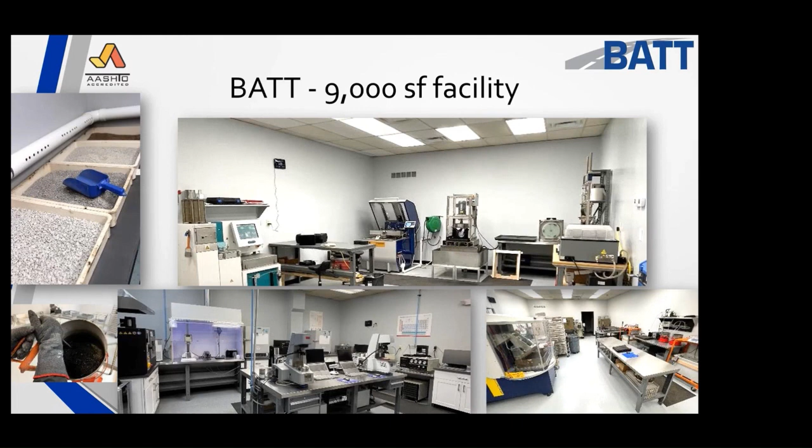Other things that I offer, as you know, I get into everything from consulting services, product development, and training, and so on.

The product development side, where I've really worked closely with Surface Tech, where they've allowed me to say, what else can the fiber do? Well, Phil, do you think it could do this? What test could help us understand this? And on a commercialization piece, which direction do we need to look at going?

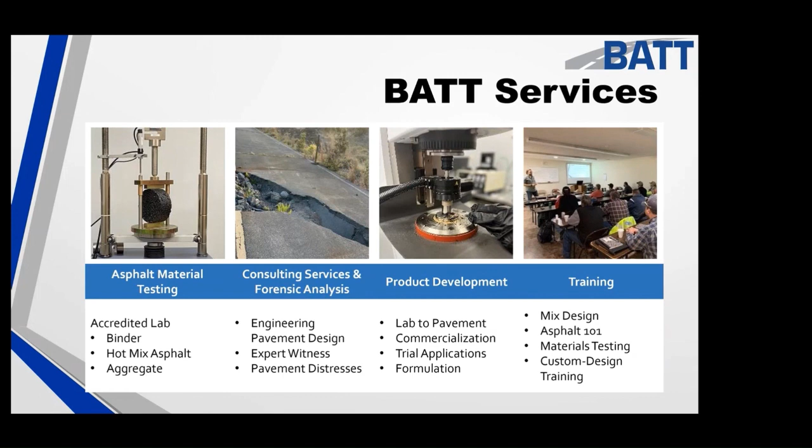And Surface Tech has been one of my number one clients since 2017 when I jumped down this road.

Something new that we've added is pavement condition index monitoring, and PCI, as we call it, video monitoring, where it gives an interactive map where you can go and begin to look at it. Surface Tech recently did this, and it's something we add on to it, where I have values of their pavements.

George, you saw that in the previous presentation, where we went through and we looked at different pavements and what their life looks like after 5 and 6 years.

Now, I'll throw this in there. If I were to look at aramid fiber over concrete after 7, 8 years, it's probably going to look about the same as regular mix. It's going to show a big delay up front, but eventually it's going to crack because you've got a mismatch of materials. By using the interlayer and the fiber, you can begin to remove cracking altogether.

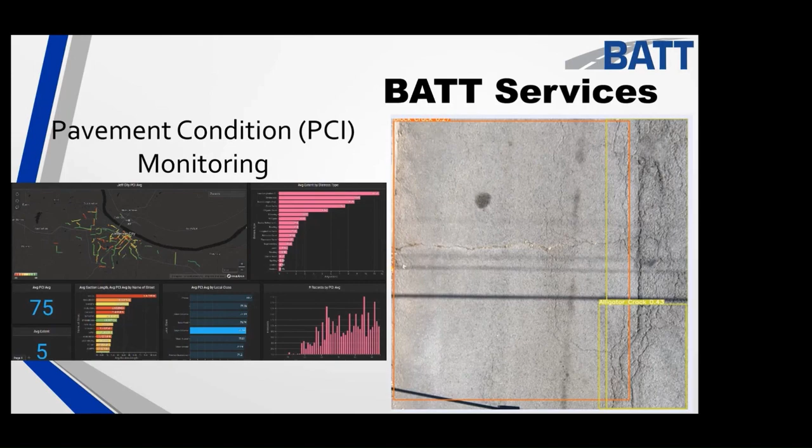I'm not going to say we can remove reflective cracking and stop it, okay, because it's going to come through at some point. But I'm going to show you data that I think you'll be pretty impressed with over what we can do.

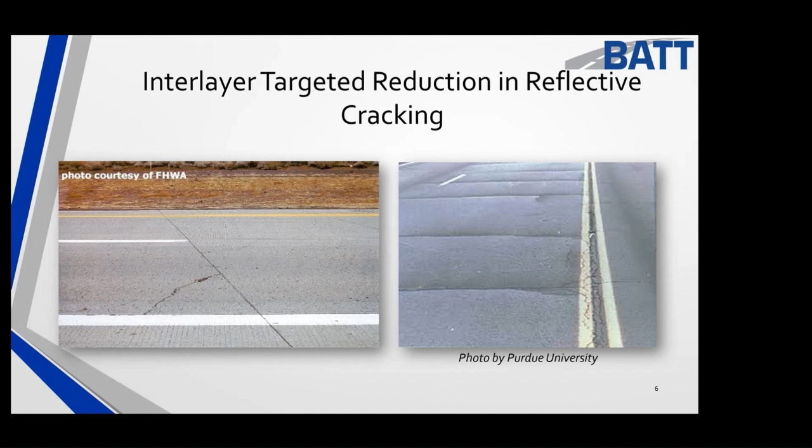So the background, as I mentioned, reflective cracking happens anytime we have a mismatch of materials, asphalt over rigid. When you put anything over this picture on the left, the crack will show through, especially the transverse crack. Longitudinal cracks, not as much. Corner breaks, not as much. Mid-slab cracks, not as much. But where we've done a saw cut and have a defined joint that wants to move up and down, the load transfer from one slab to another typically starts to drop below 90, and now you've got movement that can be pretty significant.

In the early 90s, these were being used with various levels of success. The French called it 'sand anti-fissure,' but they never really could get it to take off because they never addressed the different climates that we may see.

1998 is when I jumped onto it. Koch is a very large polymer supplier, and they saw this as a really good play for us, a good way to develop high strain polymers. Not any polymer would work. A lot of people tried it, but to get something that would go, for instance, in a fatigue device—George, you just saw people run tests in a fatigue device at 2 and 300 microstrain. I was running tests at 2,000 to 3,000 microstrain. Not 200, not two. I'm operating at 2,000 microstrain, which is unbelievable. The machine itself begins to want to jump off the table, and you have to have it in the chamber. It goes into resonance if you don't adjust it right.

I like to think of this material like a VP told me one time: I broke a machine. It cost $20,000 to repair, and he said, 'Phil, you seriously broke a machine with this'—it was Brian Majeska, Steve. He said, 'you broke it,' and I'm putting my head down, feeling bad. And he said, 'no, Phil, this is absolutely awesome, incredible that our new material broke a machine.' So a neat way to think about it.

Now, what looks really simple, guys, is a razor edge design. It's a 4.75 millimeter mix, usually placed about 25 millimeters thick. Asphalt content, I'll tell you, even goes 8.5 to 9 to 10% asphalt—impermeable. You look at this and say, there's no way it's going to work. Just wait, and I'll show you, because this is an area where I like to do the things that people normally don't do.

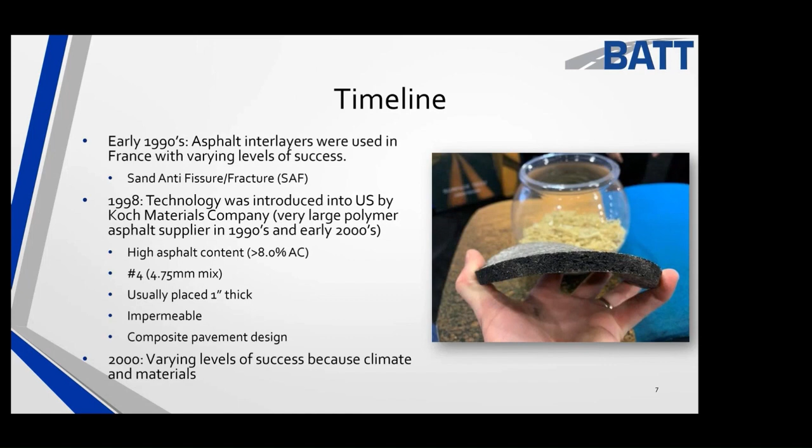In 2000, we saw varying levels of success because we were trying to do the same thing the French did—we had one product and were putting it down everywhere. So what we did was begin product development, and I pretty much didn't travel for two years, putting down products in the northern U.S. to the mid to the southern, from near Minnesota all the way down into Texas and across the U.S. At the same time, I was putting them down in China. China took off with this, and they probably today put down more than anyone. They took the technology, pretty much kept the technology—won't go into that one—and kicked us out. But they absolutely loved it.

One thing we found out was that we were looking at 4-point flexural fatigue, but not just doing it at 20C—we're doing it at 15 and 10C. So we began to base this system on climate, and we're looking at in-place air voids of 2 to 3%, not your typical 7 to 8%. Makes a lot of people really nervous. We used a Hveem stabilometer back then for rutting.

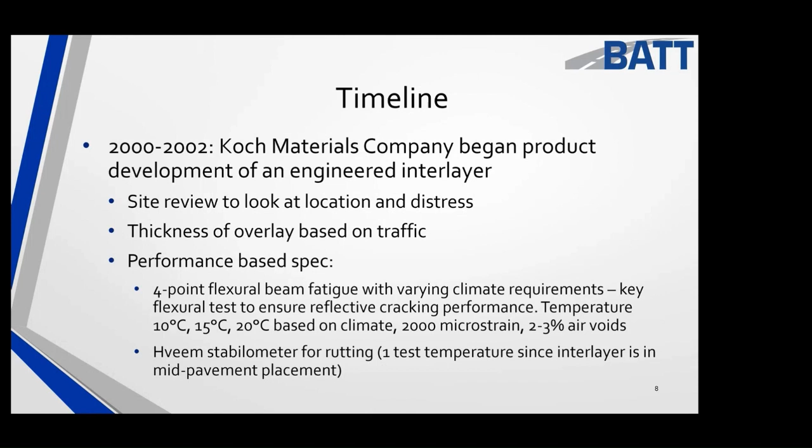Now, one thing I want to add, and I know somebody wants to ask the question—did we ever have a pavement fail and rut? Not one. Not one to date. I've done probably 27, 28 installations in the U.S. Not one ever rutted, going back to 1998, and a lot of these are on high traffic routes.

Can it be used over asphalt pavements? Absolutely. Could you use them in parking lots? Yes. The only pushback is that you've got to have a decent overlay thickness to protect the interlayer—we'll talk about what that looks like. You cannot leave the interlayer exposed to high traffic. We could design it so you could, but the problem is, since it's impermeable, it becomes slick. That's why you really need to be able to cover it up.

So in 2002, 2006, we continued on with our development, but we also worked with University of Illinois. We worked with Bill Buttlar, Eshan Dave, while he was still there, a young man named Song who's now with Caltrans, and a guy named Wagoner who worked over in Pennsylvania.

So we had a goal. This was called the National Science Foundation Grant Opportunities for Academic Liaison with Industry, meaning we worked together with the university on a $250,000 project to begin to take the $1 million we'd already put into it and add more to it with modeling.

I don't know if any of you have heard of the DCT test. The DCT was developed out of this project. Steve, I know you've heard about it. This is where Phil Blankenship first met Eshan Dave, who is now considered somewhat the father of the DCT, along with Bill Buttlar. So this is why I've got a gray beard. It's a long time ago.

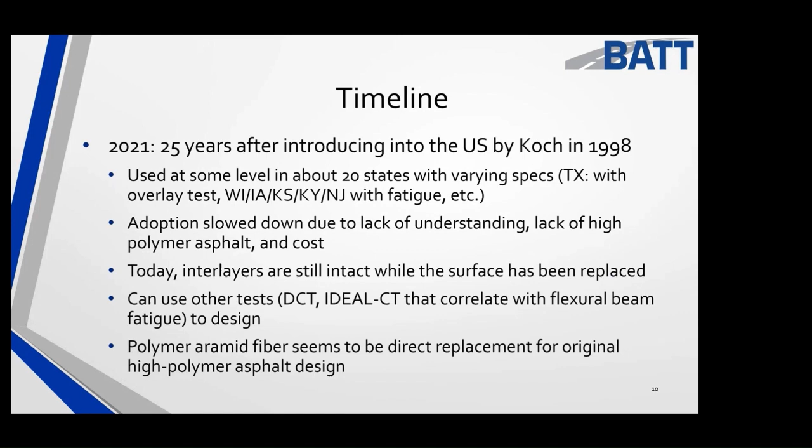You can use other tests, DCT, IDEAL-CT, that correlate with flexural fatigue, and I'll show you how that works. And then what we found out is that aramid fiber is a direct replacement for original high polymer asphalt design, and even gives this another kick that we weren't able to do before. I think it's made it a lot better product.

Some examples — one we started, and the reason I mention this one is there's a TRR, Transportation Research Record, paper on it. And by the way George, I was talking with a friend of mine, and there are several places where I wanted to publish some stuff, and I've decided instead of keep kicking it to the U.S., I may just start putting some stuff your way and over in Australia, and that'll give me a reason to come your way, right?

The Australian Road Research Board and so on are a highly respected consortium over there, just like TRR, Transportation Research Records, are here. So this made it into the Transportation Research Records.

We tried to overlap the joint so that you did not have a joint on top of another joint. That technique has taken off in the U.S. today, where they do a lot of that overlapping, not just with the interlayer. They've done that now with others, whereas we used to build joints on top of joints, which was not right.

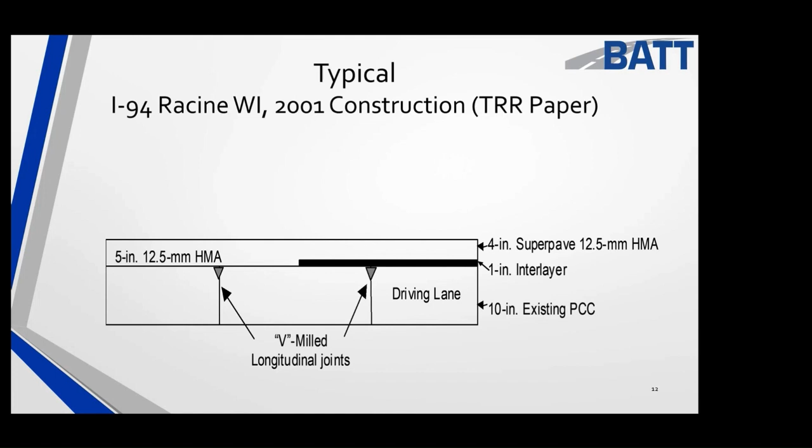I love rubbleizing, but the moment that you rubbleize, you just devalued your whole concrete pavement. So this is a way that we can leave the concrete in place without having to shut down these pavements for a long, long time.

This was the project in 2001. Studies began to look at it, and after 2.5 years they began to see results. In the early years there wasn't a lot of difference, but then the interlayer began to outperform early on.

Now, this was just one time, from the paper that was done in 2004. After I left Koch in 2006, I didn't follow it up anymore.

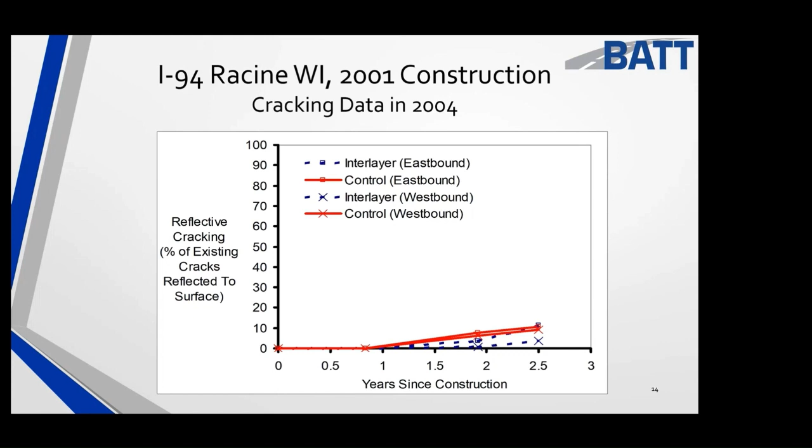But some pictures were interesting. The control had very defined cracks compared to the interlayer. This was a bad pavement, folks. The interlayer had a hairline crack versus this massive crack, which went all the way down, allowing a place for water intrusion.

This one was actually offset so the original joint would have been about 3 feet over here. We tried to understand pavements like this, chasing these cracks right down to the joint. The joints were up to 3 feet apart - about a meter offset - and the cracks were offset at 45-degree angles over this pavement.

This again is a 25 millimeter layer. I want you to look at this and what it's doing. This part here was completely intact, so the water path was cut off. That is when we knew this interlayer was much more than a crack delay - it improved rideability and long-term life because it removed water from the base and so on.

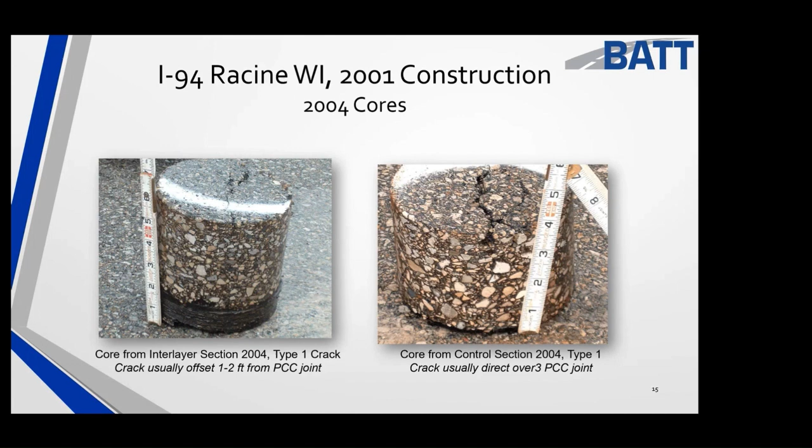We then went to a very cold region in Decorah, Iowa. This is one where we believed we had nailed it. What I did was take the picture on the right after about 4 years - let's see, 3 winters over 4 summers, so 3 winters.

I took a picture on the right. I'm in the middle of a roadway, people watching, but it's Iowa, so there's not a lot of people out - you just have to be there to understand it. So I'm in the middle of a roadway with people watching my back, and I take a picture of how they've already treated it. Look at the reflective cracks. Look familiar?

The interlayer section was behind me, so I did a 180, turned around and took the picture on the left. Can you see a difference? What's amazing is this roadway already had maintenance, so they've already spent thousands on it. This one, they didn't spend anything on. And that's in a cold area - that was just remarkable.

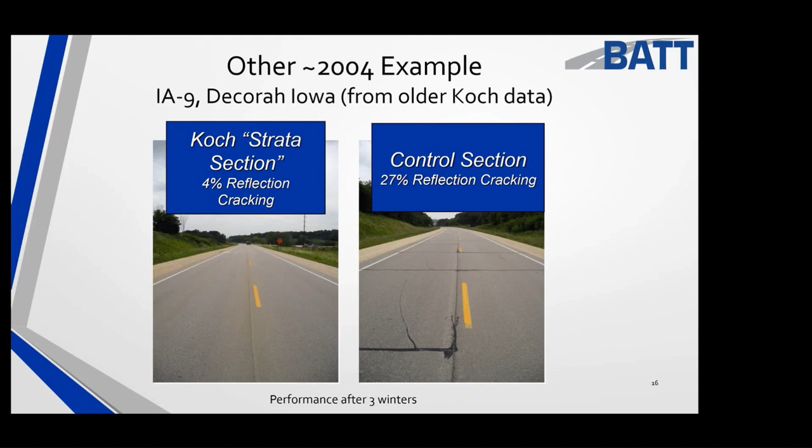So we move forward, and I'm working on a project with an engineer friend of mine. I'm on a consortium in Kentucky for general aviation airports, where we're writing specifications - I do a lot of work on that. One of the things that came up was this early micro cracking, and they said they wanted to build up this pavement surface, but when you deal with airports, you really don't want to mill anything off. You always want to leave the structure intact.

That way you can have heavier loads, and your airport gets upgraded. So they wanted to put down an interlayer, and Gary said, Phil, can we do it? I said the problem is I can't get the asphalt product anymore. I started scratching my head, called Steve, and asked if in 2 weeks he could help supply something, because I wanted to try this. Sure enough, Surface Tech got in place and was able to put fiber on this job. It actually ended up being less expensive than the interlayer of old, because now we're using fiber, not specialty asphalt. Turned out it was a direct replacement, if not even better.

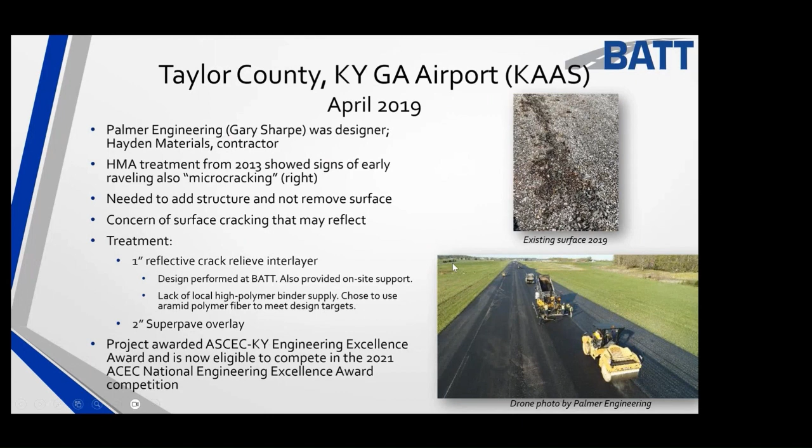This is not for the average person to do. This is 8.5% asphalt, it has aramid fiber in it, and you're looking at about 8% dust. It's a fine graded mixture, and it's 25 millimeters thick.

Watch what happens when you put a roller on top of it. By the way, everybody gets nervous, even the roller guys tend to not want to roll it, and I have to sit there and look at them and say, guys, put the roller on this.

You'd never know it's an interlayer, would you? Pretty incredible. It's not pushing laterally. And that just goes to show you, we've got to really get out of the box of where we'd normally be.

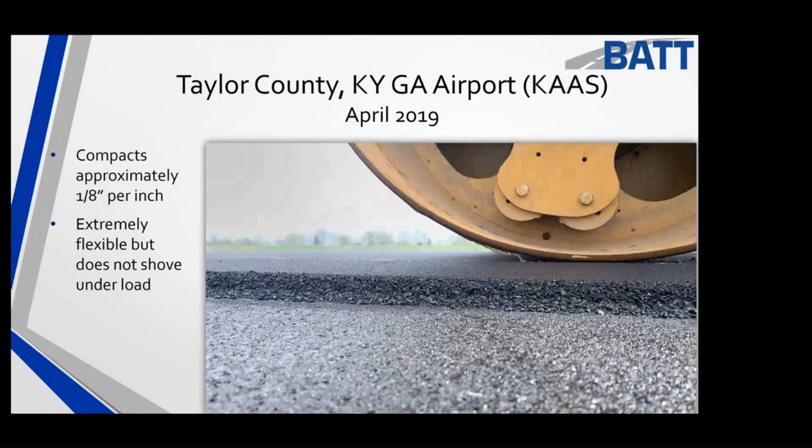When I say 1/8 inch per inch, for a 25 millimeter layer you're probably looking at it compacting about 4 millimeters on a 25 millimeter lift, versus the standard 8 or so that you would see. Very, very dense mixture.

At the end of my tenure in 2006, on the projects looking at where we used a proper overlay, where we had used the fatigue cycle, the 100,000 plus fatigue cycle interlayer, 18 projects up to 4 years old, we saw an average improvement in reflection cracking of 71%.

Steve, my favorite comment I got on this was from Canada when I presented one time. They came back and said, that's really interesting, do you not have any data past 4 years old? I said, I challenge anybody out there to track 18 projects for more than 4 years. I don't know of many agencies that track them for more than one, but we did.

And 71% improvement. This is what a mix design may look like. So I want to walk through, notice there's no RAP in the interlayer.

71% improvement mean? What's that? You're saying 71% improvement, what does that actually mean in comparison to something else?

71% improvement in reflection cracking. So in the cracks that you would see that would reappear, you had 71% less cracks when you use the interlayer. 71% less. That's compared to just a standard overlay, say a standard overlay. You're saying there's 71%. Okay, that's all right, just because I wasn't sure.

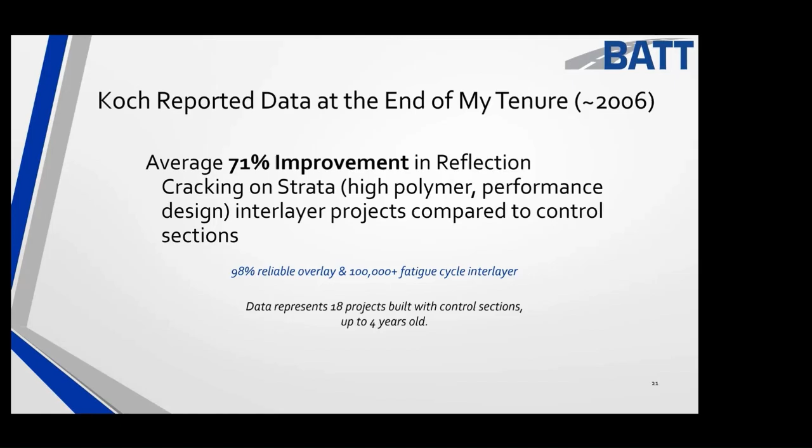So this is a mix design example. Peter, George, I don't know if I've ever shown this to any of you guys before. Maybe you've seen something like this, but this really gives you an idea. Notice in here that these are fines, so all of these materials are minus 4.75.

I'm using things that a lot of people would throw away. This is a dusty aggregate, this is a clean aggregate, this is a regular sand, this is a dirty aggregate, and this is typically what we're doing, right? It's a fairly dusty mixture.

Notice I put the aramid fiber, and in this one I've got a double dose, or 4.2 ounces per ton, and I adjust that as I need it. Sometimes I may have to go up a little higher, but typically I'm not going to be below the 4 ounces. In this case, a single dose is about 66, so you're looking at like 132 grams per metric ton.

Hey Phil, just one question. So what you're doing here, the binder is just a standard non-modified binder, is that correct? Well, this one is modified.

So what we did to take it up a notch, George, that's a good question. They used a little higher modified one. What I like to do, the poor man's version of this, would be to use your standard binder. If I want to really take it up to its full potential, we need to use a lightly modified binder.

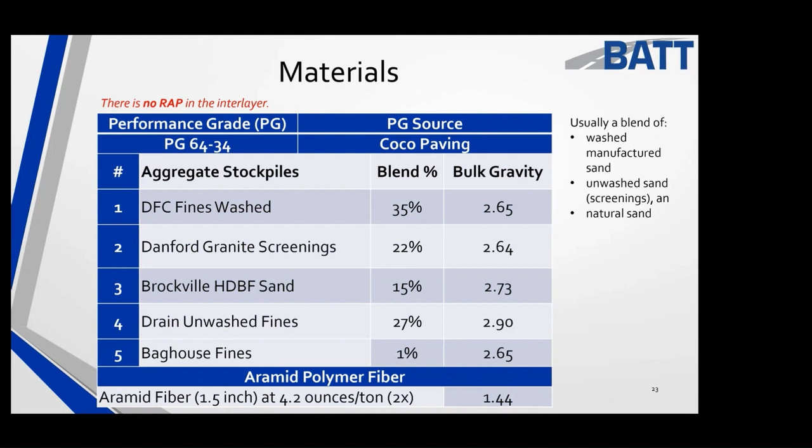You do not have to use this highly modified binder. You can use a lightly modified binder, maybe 2% polymer, George. Yeah, got it, that makes sense.

Thanks. Okay, so this is the grading. Now, I'm using the US sieves here, but the number 4 would be a 4.75. This would be a 2.36 millimeter, this would be a 1.18 millimeter down to our 75 micron over here. You see the grading with the metric, that gives you an idea how fine that mixture is.

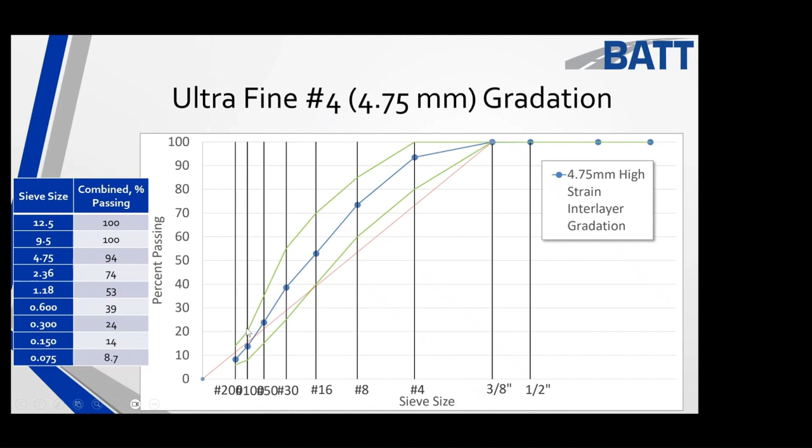This is a max density line. What's happened, I've actually produced some that's way up here at the top. And when I do that, you'll actually have voids that you can't fill. You can create a permeable mix, but we like to go impermeable.

These are the typical gyrations and the volumetric properties if you're looking for it. The VMA can be approaching 20%, VFA is 93. I mean, these are just ridiculous numbers. And I love it because this is the stuff.

If I were bringing you something that you did every day, why would you want to try it? We're trying to fix a problem that nobody else has fixed. And that's why this mix works.

So when you take the uniqueness of this mixture with the high asphalt, with the stability, combine that with a softer grade of asphalt with the double aramid fiber, you get this incredible combination of materials.

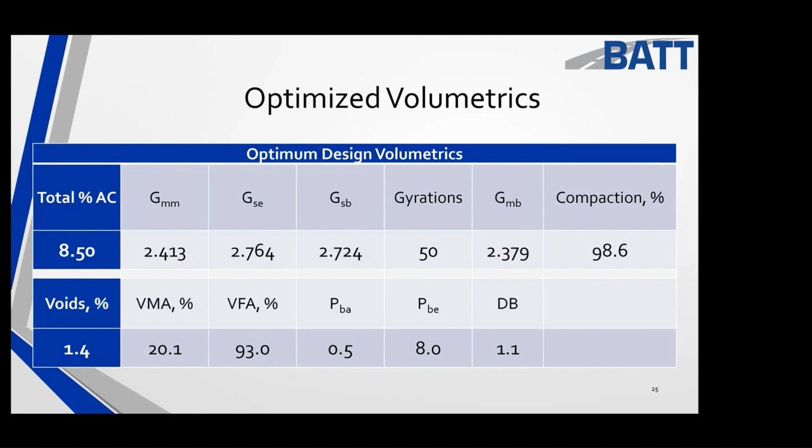On an ideal CT, and I think this is fun to show you, what I mean by very unique, I could show you beam fatigue, but I want to show it to you in ideal CT. A normal mixture may have a 153.

Have you seen a decent amount of ideal CT data, George? Yes, I have. So a number over 70 to 100 is really good. Okay, this is a 153.

Now look at the temperature here. I now look at the interlayer with 8.2 asphalt, 25C, this is a very lightly modified grade in the US, double fiber in this interlayer, and look, I went from a 153 to 1712.

Unbelievable, that's 10 times more flexible. And if I had a sample in front of me and you saw me do it, I would be bending it here in front of you.

And you still have your samples, George? Yeah, you carry on, I'll grab one. You showed a picture of it earlier. Yes, it was at the beginning. I know George has some, so we have some fun with it.

These other bars represent what we do if we wanted to go to a cooler climate at 20C or an ultra cold climate at 15C, it's the same mixture. I just take my asphalt grade and go down a grade softer, still using the double fiber, and I can still get this relative 10x or more.

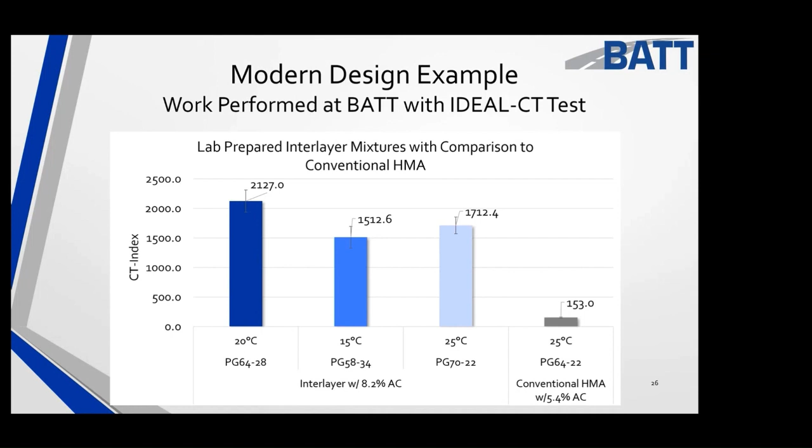With that, these are some of the values I'm using for Hamburg today, and these are values I recommended for Pennsylvania. As you saw, what I put in there is what we're coming up with.

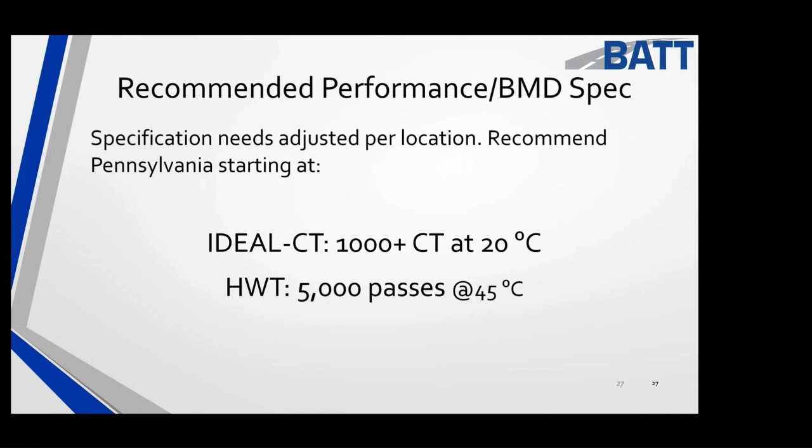Again, advantages - and I didn't talk a lot about this at the beginning - it significantly delays cracking, as I mentioned. It's impermeable, and it does force lateral drainage. So you've got to think about that. If you're depending upon vertical drainage, this will force lateral drainage. So as you put it up near the top, you're going to want to daylight your water to the side of the roads.

We have performance-based specs. Whether we're using fiber or chewing gum in this, these tests are meant to identify performance. Fiber is my go-to because it just works, and it's easy, and it's got an EPD rating, which gives it an even higher benefit. It can be milled, but you can also leave it in place. It uses standard construction methods, locally available materials, and has very quick construction time and return to traffic.

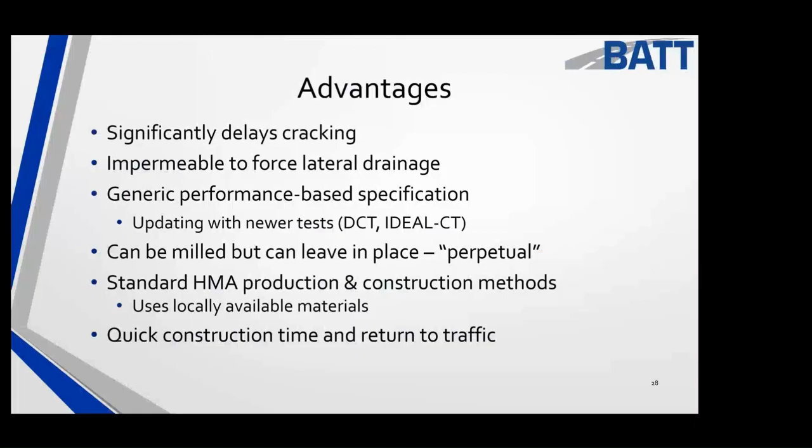What I did not mention is site selection, and George, I will package this up and send it over to you so you'll have it. But in this case, I mentioned that you can use it by itself, but using it with a fiber reinforced surface or some type of crack-resistant surface makes the interlayer even better. It's sort of a 1-2 punch, if you want to think about it. PCC joint transfer of 70 or better.

Can you use lower? You can, but at some point the PCC pavement is in such bad shape - we can make a good pavement great, but we can't make miracles happen. So if your road's falling apart, we can cover it up, but that's about it.

Pennsylvania was a state, and they asked, 'Is it going to help our pavements?' And we said, 'How often are you overlaying?' They said, 'Every 4 to 5 years.' I said, 'Well, we're going to take you out to probably 7 to 10 years.' They said, 'That's great.' And that's where we were with it.

The interlayer you can actually knead, and it will penetrate into your cracks or joints. Joint seal sometimes can bubble through because it's an impermeable interlayer, but it does not affect the performance. I prefer to leave some asphalt over the concrete so you do not have to mill to the concrete, or you can use a leveling course over the concrete. Again, it's very paver friendly, and we just need to avoid trapping moisture after a rain, because it's an impermeable interlayer.

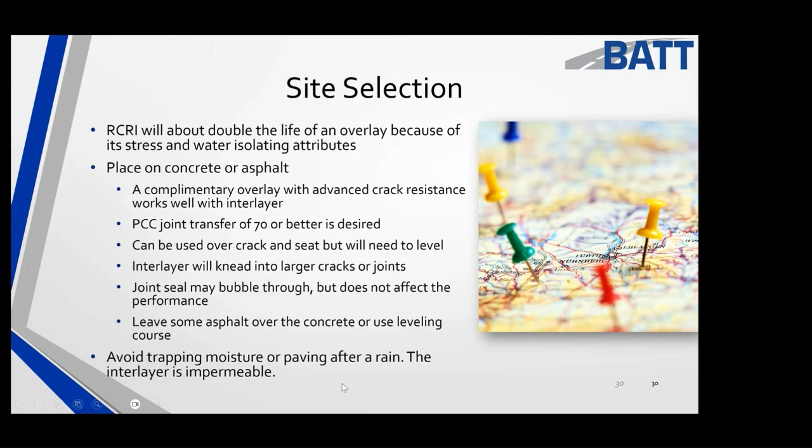When I go to construct it, we typically cover within 5 days of placement. It's open to traffic after it's cooled - it says 150 Fahrenheit, so what would that be? That would be about 70 C or so, somewhere in there, I think.

And you do want to put tack or a bonding layer on the interlayer, at a normal shot rate for a smooth surface. Again, I'm using a steel wheel roller on it in static mode. This is really, really easy to pave with.

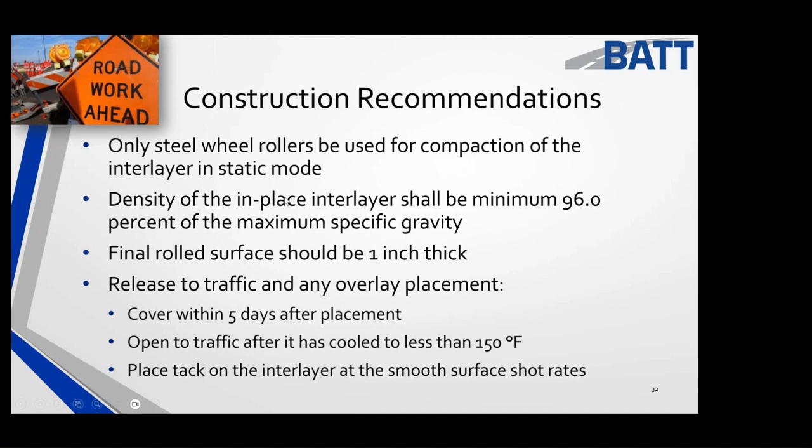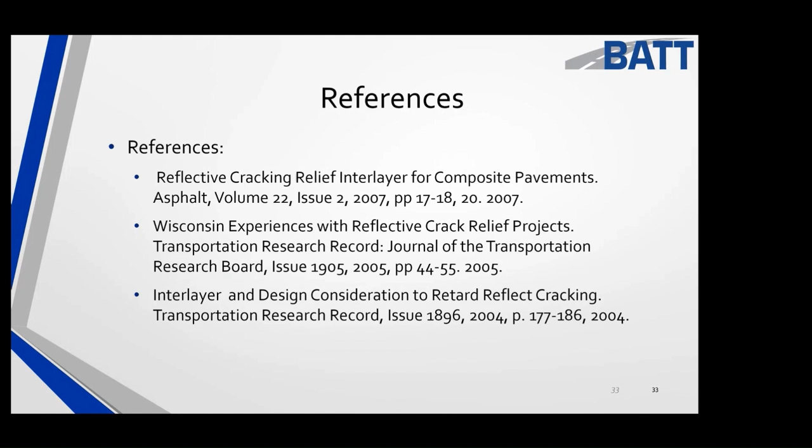For medium level interstate traffic in the U.S., we would typically be putting about 50 to 60 millimeters over top of it. If I have a really light loading, I just need to get somewhere around 35 millimeters over top the interlayer, and you're good to go. So let's say sort of 35, 60, and 75 to 80 millimeters - this is your overlay thickness depending on traffic.